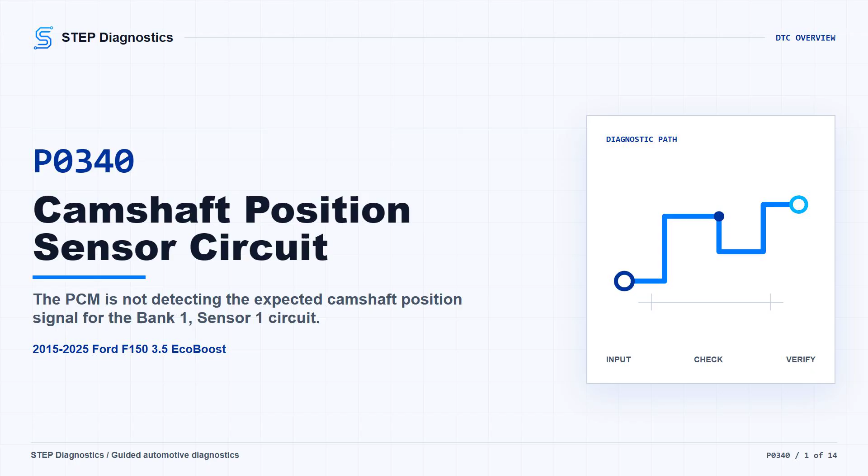On this 2015 to 2025 Ford F150 with the 3.5 EcoBoost, P0340 points to a camshaft position sensor circuit concern. In plain terms, the PCM may not be seeing the bank 1, sensor 1 cam signal the way it expects. The truck may have a no start, it may run with cam timing or sync complaints, or the code may come back intermittently. Broadly, think in 3 buckets: the CMP sensor and its wiring, electrical interference or power and reference circuit issues, and possible base engine or VCT-related conditions that can affect cam position.

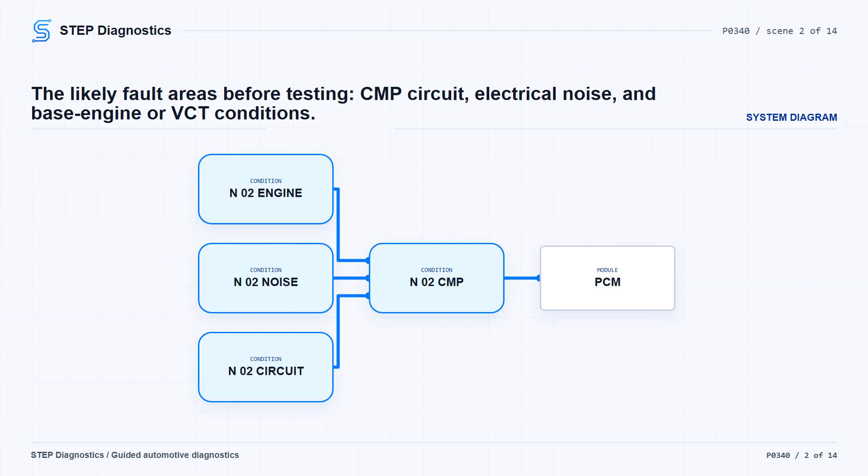Start with the basic system checks, then follow a structured diagnostic approach instead of jumping straight to a sensor. First, check for codes. For this episode, we are focused on P0340, but if other cam sensor or cam timing related codes are present, use them as context for which CMP sensor and circuit the PCM is complaining about. If the vehicle is a no crank or no start with this CMP code present, move directly to checking voltage at the suspect CMP sensor.

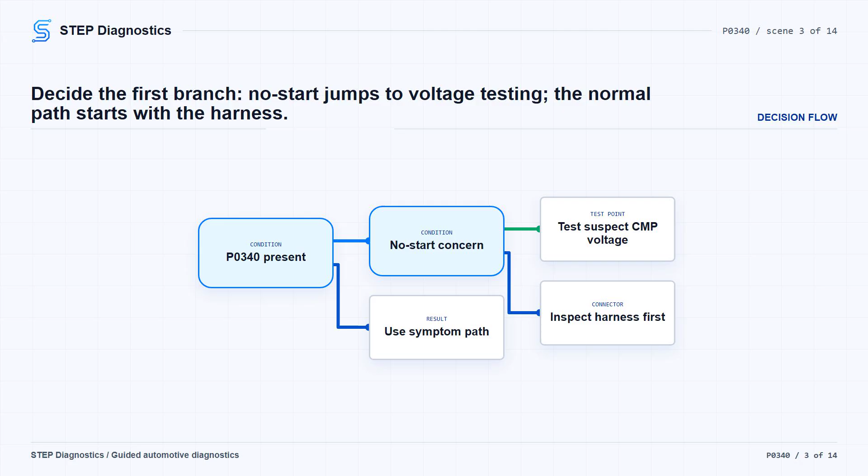For the normal diagnostic path, continue with the harness inspection. If the CMP code is not present and you are chasing symptoms only, pause this code path and follow the symptom-based diagnostic direction instead. With the ignition off, inspect the harness before you start back probing or condemning anything. Look at routing, alterations, shielding issues, and anything that could let another system induce noise into the cam signal.

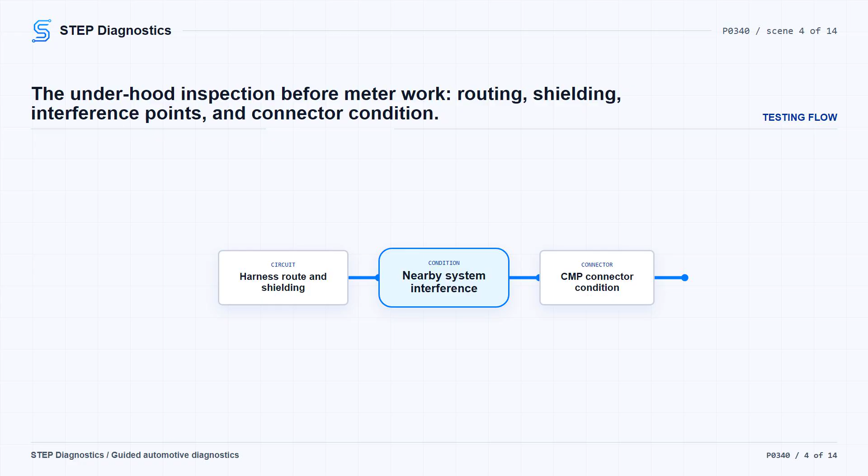Also inspect the CMP connector for damage or corrosion. If you find a harness or connector concern, repair it as needed, clear the PCM codes, and repeat the self-test. If the harness and connector check clean, move on and try to make the code return.

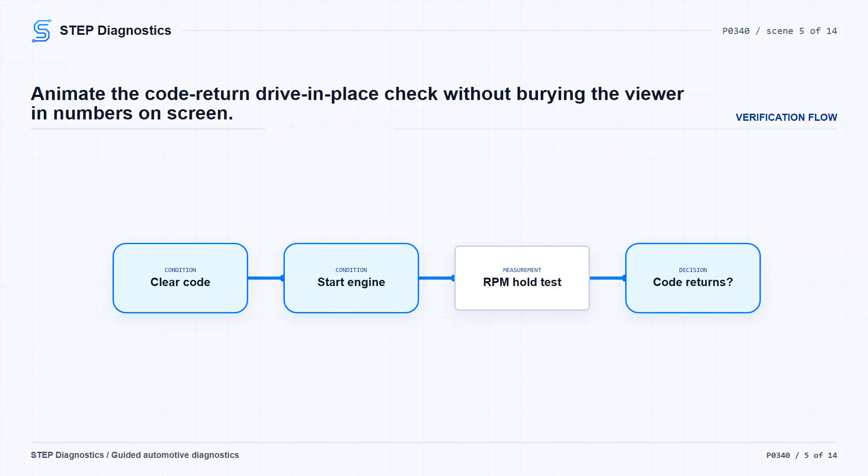Next, clear the code and attempt to retrieve it. Turn the ignition on, start the engine, raise engine speed to greater than 1,500 RPM for 10 seconds and repeat that 3 times. If the CMP code returns, keep going down this electrical path. If it does not return, do not force a conclusion. Consider that ignition system noise, alternator noise, radio frequency interference, or crank sensor concerns can affect this type of signal.

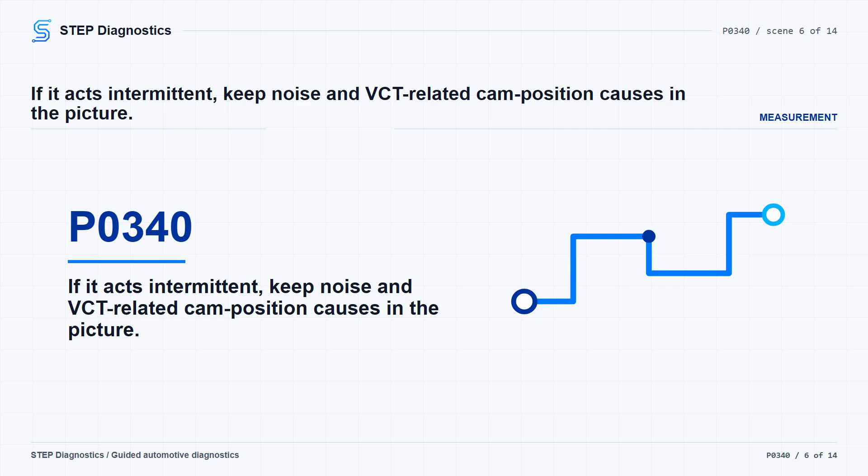On a VCT engine, also keep oil level, oil filter condition, oil contamination, and VCT system concerns in mind, because they can create cam positioning errors.

If the code comes back, check the generator for excessive electrical noise. Start the engine and listen for audible electric noise from the generator. Then shut the ignition off, disconnect the generator or regulator B+ connector, restart the engine, and listen for whether the noise stays steady, decreases, or increases.

If the noise stays steady with the B+ connector disconnected, continue to the CMP sensor voltage check. If the noise does not stay steady, diagnose the charging system noise before continuing with the CMP circuit path.

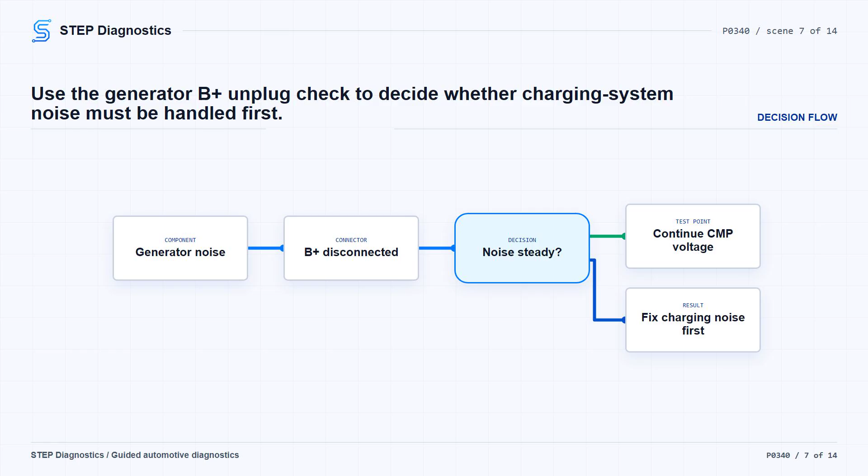Now test the suspect CMP sensor indicated by P0340. With the ignition off, reconnect the generator or regulator B+ connector, disconnect the CMP sensor connector, then turn the ignition on. On the 3.5 EcoBoost, measure the CMP sensor voltage at the appropriate connector for the suspect sensor.

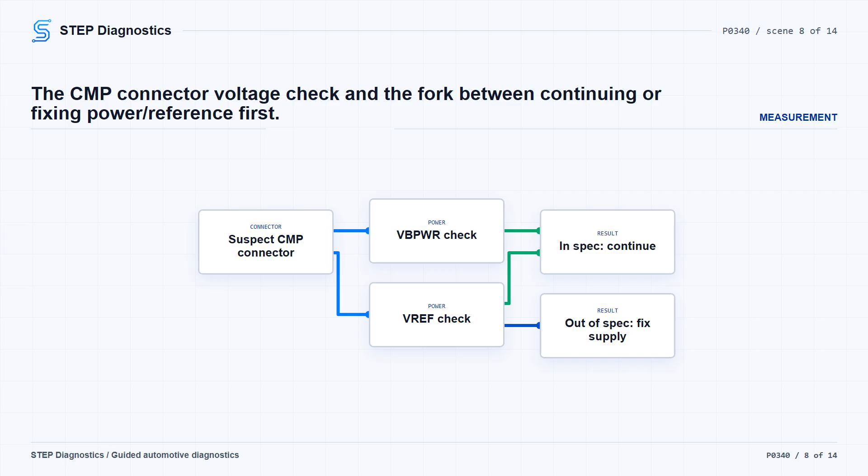The path continues if the VBPWR circuit is greater than 10.5 V, or if the VREF circuit is between 4.5 and 5.5 V. If the voltage is not in the expected range for the circuit being tested, stop this CMP signal path and diagnose that power or reference circuit issue first.

If the voltage check passes, leave the suspect CMP sensor path and check the CMP circuits for an open. Disconnect the PCM connector and measure resistance through the listed CMP signal and return circuits for the suspect sensor. The resistance should be less than 5 ohms. If it is, continue to the short check. If it is not less than 5 ohms, repair the open circuit, clear the PCM codes, and repeat the self-test.

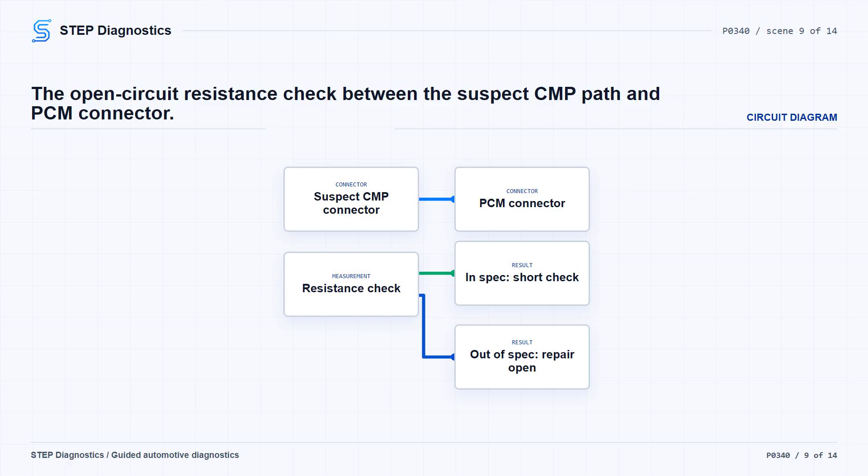Next, check the CMP circuit for a short. Measure resistance between the listed CMP circuit lead pairs for the suspect sensor. The resistance should be greater than 10k ohms. If the resistance is greater than 10k ohms, continue to the short to voltage check. If it is not greater than 10k ohms, repair the short circuit, clear the PCM codes, and repeat the self-test.

For any pin pairing that is not clear during this short check, pause and recheck the earlier diagnostic path rather than guessing at the measurement.

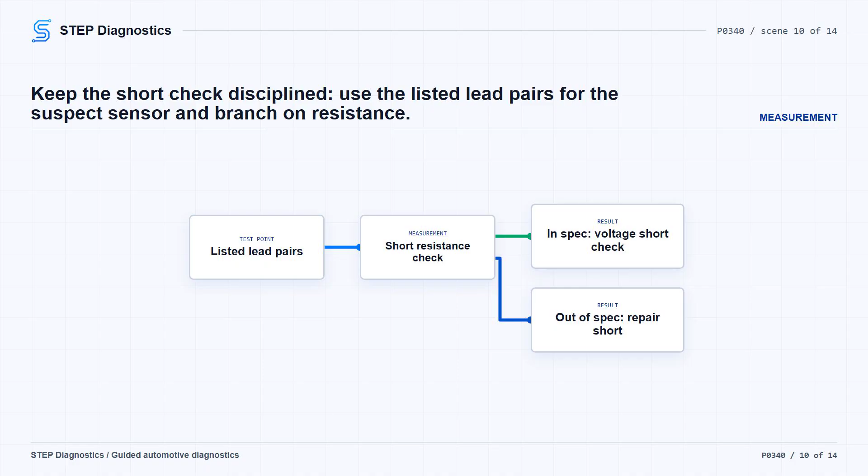Then check the CMP circuit for a short to voltage. With the ignition on, check the listed CMP signal leads for voltage at the suspect sensor circuit. If any voltage is present where this check is being made, repair the short circuit, clear the PCM codes, and repeat the self-test. If no voltage is present, reconnect the CMP sensor and PCM and move to the operating check.

If the matching test lead for this voltage check is not clear, do not improvise the hookup. Pause and recheck the diagnostic path before continuing.

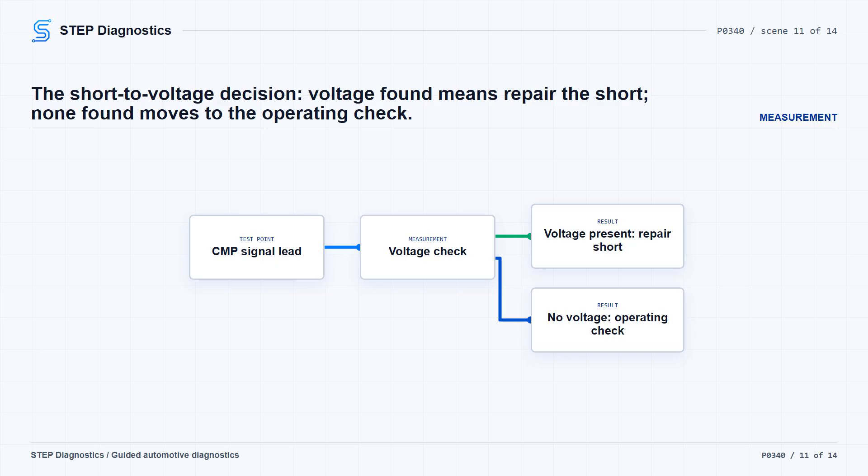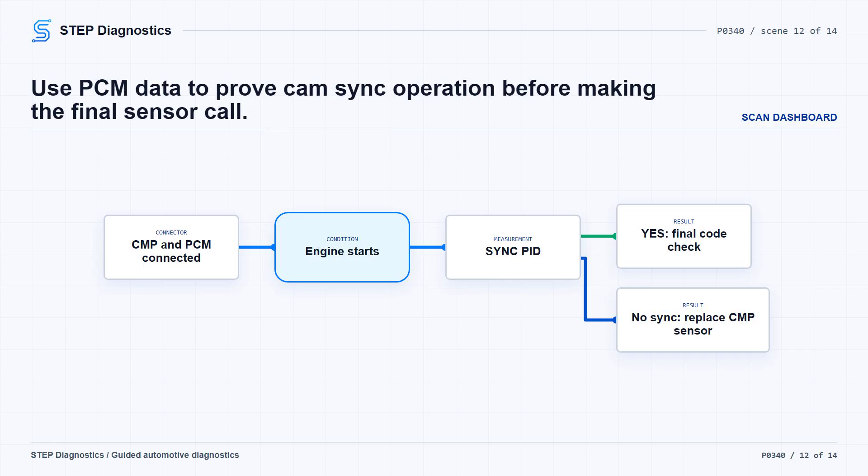With the ignition off, connect the CMP sensor connector and the PCM connector. Start the engine, access the PCM data, and monitor the sync PID. If the engine starts and sync reads YES, go to the final code check. If the engine does not start or sync does not read YES, the supported next move in this path is to install a new camshaft position sensor, clear the PCM codes, and repeat the self-test.

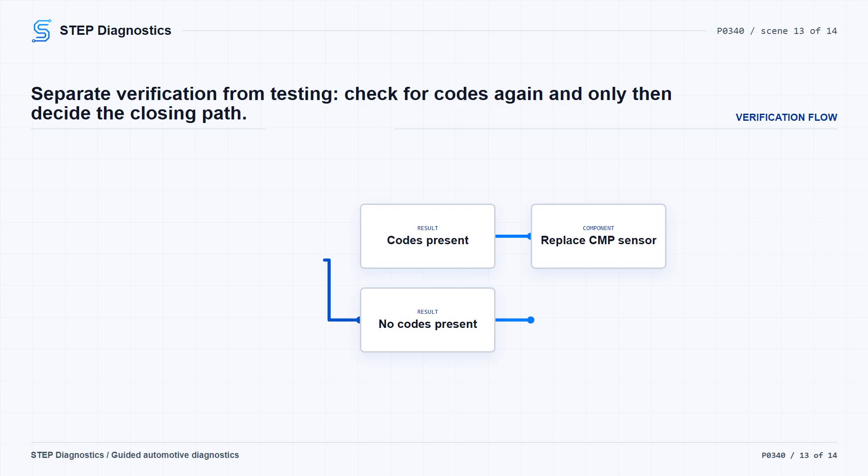Keep verification separate from the circuit testing. After the operating check, check for codes again. If any codes are present at this point, this path supports installing a new camshaft position sensor, clearing the PCM codes, and repeating the self-test. If no codes are present, the system is operating correctly at this time.

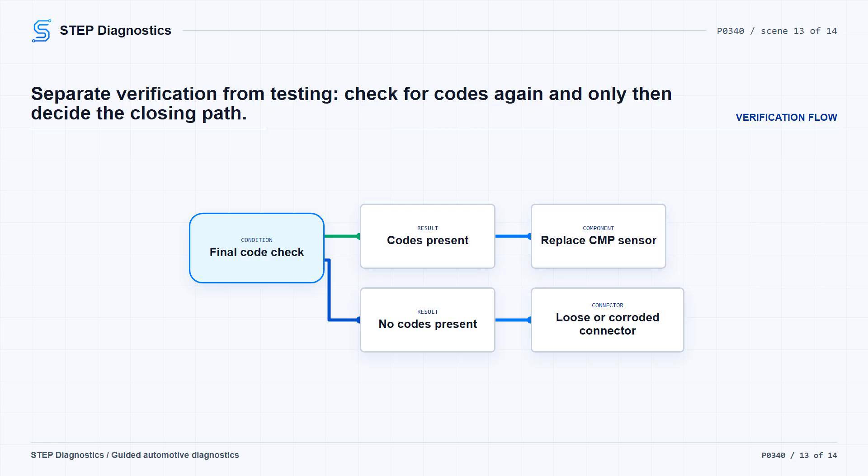The concern may have been caused by a loose or corroded connector. Clear the PCM codes and repeat the self-test to confirm the code stays gone.

The key on P0340 is to prove the signal path before calling the sensor. Confirm the code, inspect the harness, reproduce the fault, rule out electrical noise, verify the CMP power or reference circuit, then check for opens, shorts, and sync operation.